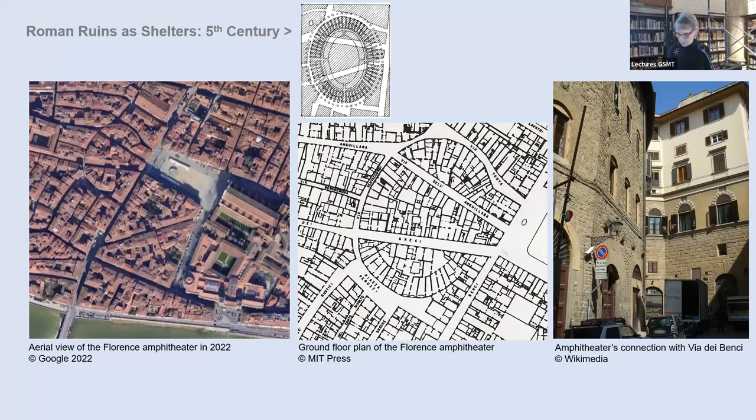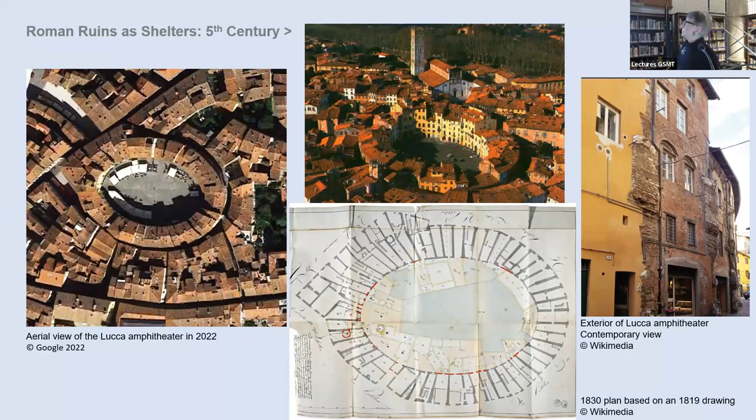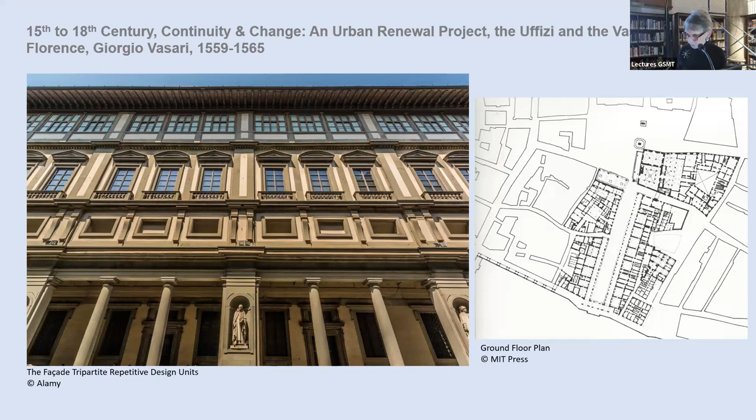And then there is, so you see this regularity here in the photograph on the left, and then the loggia towards the Arno, which is a variation on the regular modules, but is a little bit different. And then there's the corridor that goes to the Palazzo Pitti, which was meant as an escape corridor in times of urban trouble. I think the Medici were more afraid of the Florentine than they were afraid of the Sienese, for example.

So this, I call this an urban renewal project, because I think it's useful for us to remember that there are other ways to do urban renewal than the way we've done in the 20th century. And this has been vastly more successful than our urban renewal projects in the 20th century.

So now we're going to look at a project that is really, really hard to understand, but I think we'll try. Sometimes this is a case where change, and really massive change, is hidden in plain sight. When you look at this building, you think it was designed at one single period by one single person, and nothing could be further from the truth. This is a building that was built, demolished, and rebuilt, and it is dizzying.

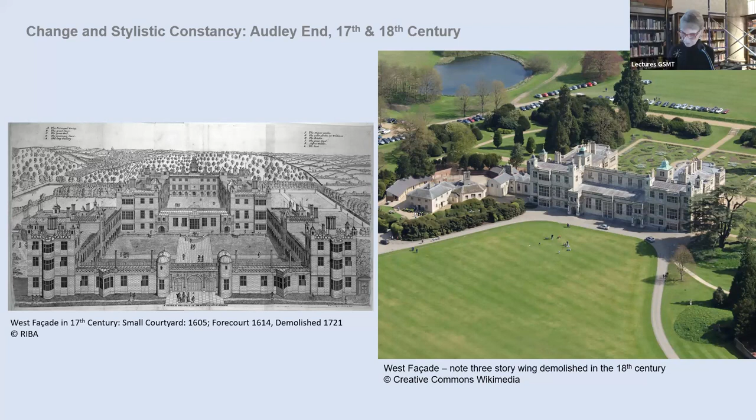So what we have now is, and this is in the same direction as this, so this still remains, these ends still remain, but this whole back has disappeared, and these back wings have been cut in half. They used to be much longer. And this happens over the years.

This happens over the years with different owners who keep redesigning the building, but redesigning it in the Jacobean style in which it was first built. So they maintain this style over the centuries. This is, I don't expect you to understand it, it's taken me a long time.

So this is the original condition of the building, and then they demolished the sides of this, and then they cut down these wings. Because they cut down these wings, this is a ruin, so they have to redesign this. Then they cut them down further. Then they rebuild them, and they're rebuilt.

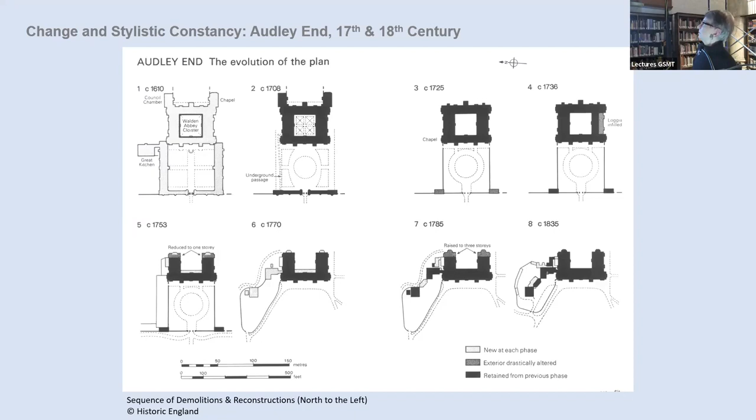But what you have to remember is that through these four centuries, because the first phase is 1605, and the last really significant phase is really in the 19th century, it's two or three centuries through which this operation happens, and people keep reviving the building in its old style, but it's a new construction.

So this persistence of dynastic ambition, you could call it, is quite fascinating. The warm colors are older, and the cool colors are younger. This is a gallery that was built by Robert Adam in the 18th century.

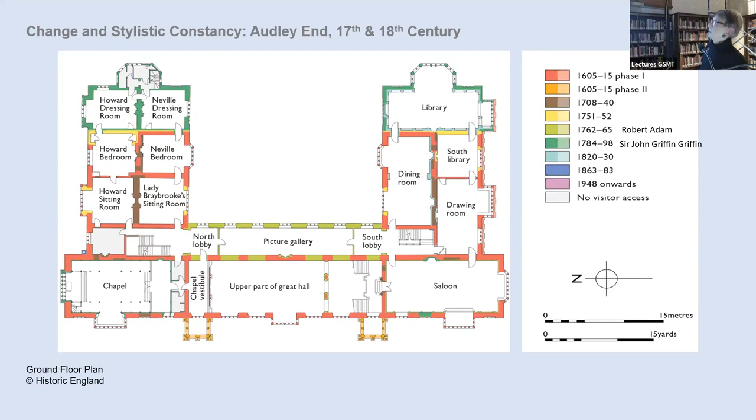So the evolution. When I said the modifications are hidden in plain sight, they are really profound. This is not a cloister building anymore. This is not a fortress anymore. This is a building that's open to the landscape, the way a classical building would be, and it's surrounded by these romantic eye catchers in the landscape.

So the relationship, the way the building presents itself, is in a way twofold. It's still a Tudor building, it's still a Jacobean building, excuse me, but it really has a classical dimension which has been added over time. And those things are profound. There are new ideas that are layered onto the building, added by multiple authors.

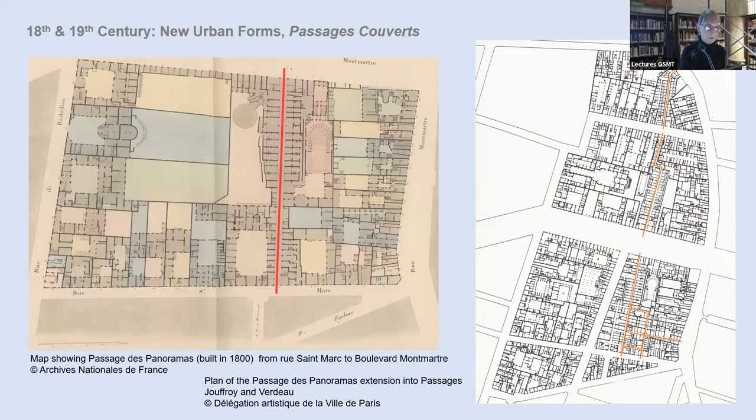The first passage was really inspired by something that had been done in the Palais Royal, which was maybe less formal, and built in the 1780s, just before the Revolution. It was built on a courtyard of a palace owned by the brother of the king, and because he was the brother of the king he enjoyed advantages that other people didn't have—one of the advantages is that the police could not come onto the site. So it was a very lively site of social life, social interactions, ladies of the night, political harangues, and so there's always been a connection between these covered passages and entertainment, and occasionally a slightly illicit set of things.

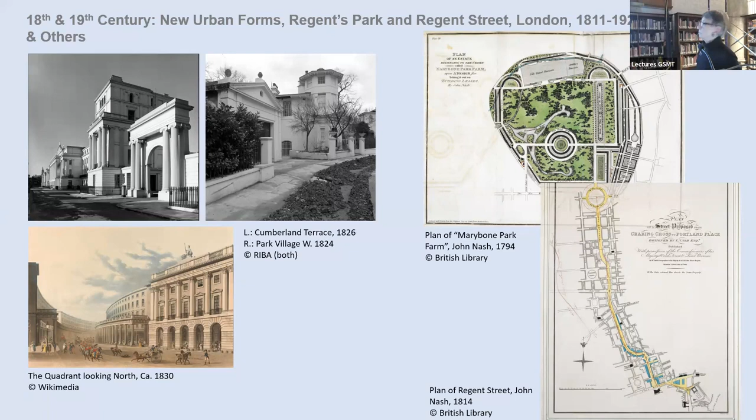But I want to show you an interesting point, which is where Regent Street turns into Langham Place and then to Portland Place.

Now, what's interesting is that Portland Place existed. It's a wide residential street, and it was designed by the Adam brothers in the 18th century. So it was pre-existing. It has these patrician houses, and I suppose that Nash couldn't expropriate them, and he kept them. But then the problem was that here was Regent Street coming, and there was a property in the way, and so he bought this property and demolished the center mansion.

But what's to me really a valuable lesson is that he kept the things that are in light pink, buildings which are kept. These buildings still exist. And he just lined the street with very narrow, very shallow buildings, and then used All Souls Church, which he designed, as a pivot for the turn of the street. So the lesson is that demolish as little as you can and use all the accidents that you can to your advantage. And he certainly did.

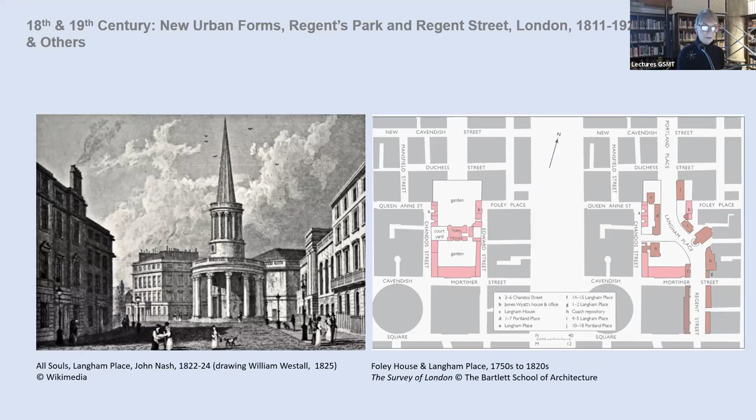So this is the termination of Regent Street through Portland Place, into this monumental, almost Roman scale housing. But the whole estate has also these little buildings. So the whole architectural palette is in part about consistency, but in part about the accident.

Again, the backs, as in the Vasari project for the Uffizi, the back is frayed. It's like the back is allowed to do what it needs to do to meet the city.

Now to the Barcelona Pavilion. This was built in 1928 for a fair in Barcelona, and actually very few people saw it. Only the people who went to the fair, and it was not up for more than a year. It was up for less than a year.

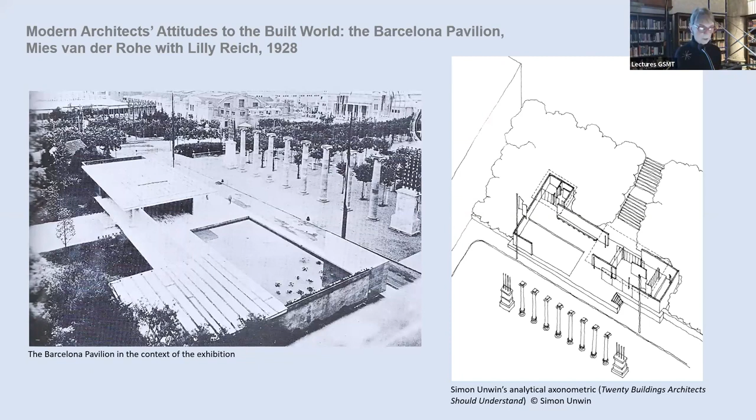That is in a way devastating, because it denies the elements of the design that Mies had used to make his design valuable. This was, on the part of Mies van der Rohe, a manifesto for modern architecture, in opposition to the old, tired formal world of Beaux-Arts architecture. And what better place to be than in a grand Beaux-Arts plan with all these Beaux-Arts things around, including the columns. So if you eliminate all of that, you deprive this building of its revolutionary force, and it's a profound misunderstanding of it.

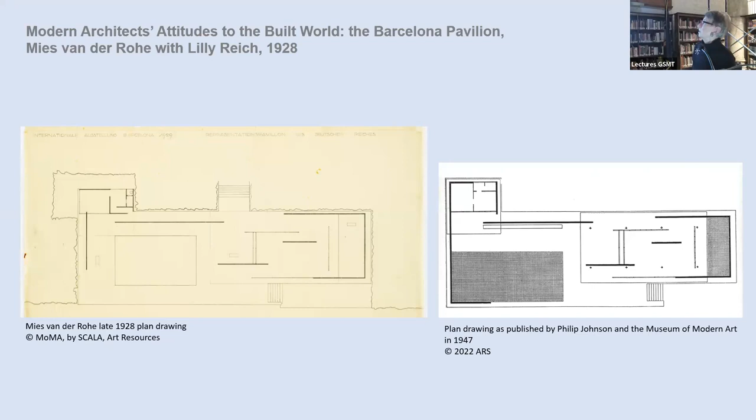Why is it important to analyze buildings in a more complete way than we tend to? It's important because when this building was rebuilt in the 80s, it was rebuilt without the columns. If you've seen it, it is profoundly disappointing, because it's missing all this processional aspect to it. So you cannot say the building has been restored. It's been rebuilt, yes, as a building, but it's really lacking, in my view, of the elements that made it what it was.

This is in a chapter I call Reclamation of Urban Fragments Post-World War II, and it's the Alte Pinakothek in Munich by Hans Döllgast, 1952 to 1957. I owe knowing this building to my friend Harry Kendall, who is here. Thank you.

This is a beautiful museum designed by Leo von Klenze in the 19th century. But what happened? Look at the middle. What did happen? To this ordered, classical revival building with repetitive arches, a center porch, and these skylights over the exhibition rooms, in 1945 a couple of bombs fell in the middle of the building, cutting it in two and cutting out the roof practically.

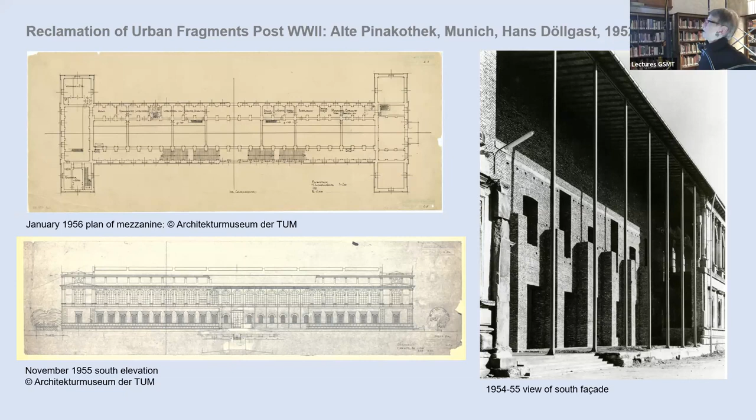He never wanted to restore von Klenze's design—the von Klenze design is left as is. When he brings back the wall, he brings back the visual structure of the windows and the visual rhythm of these bays, but in an abstracted way, and he builds it in brick—actually reclaimed brick from a nearby caserna. It creates moments of really extraordinary interest as these two things meet.

He decides to do away with the pyramid skylights that von Klenze had done, for a more minimal, trim, and linear set of skylights, supported by steel columns and a new cornice, again abstracted. When you're there, it is a very beautiful thing to see—both painful and beautiful, and you're aware of the passage of time. It is quite a wonderful thing.

This is our penultimate building: the addition to the Pepsi Cola headquarters. The original Pepsi Cola headquarters was designed by Gordon Bunshaft with Natalie de Blois of Skidmore, Owings and Merrill in the 60s, and it was designed as a very ideal object, in a way like Mies' Pavilion, in opposition to the dark city.

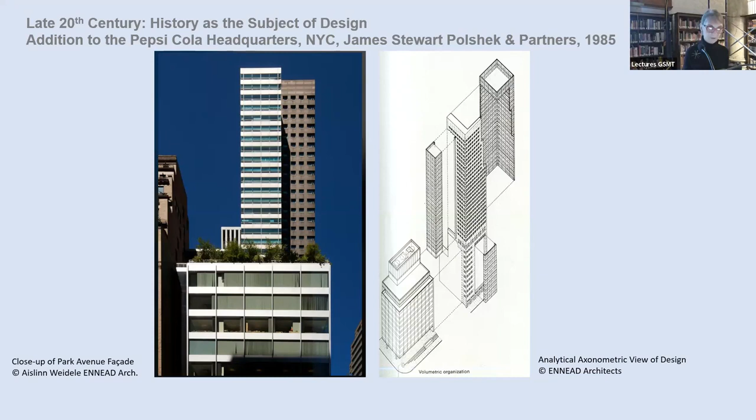So this fantastically modern building that Bunshaft and de Blois had done, which was separate from the city, now is described by the new architects as having joined the city. It's an interesting twist.

Finally, we will end on a small building on Duane Street, to remind all of us architects that you should be ambitious even with a small building. This is on Duane Street, on Duane Park. It's now being added to as we speak, so it's going to change again. But this was a warehouse, and the area was not designated as a landmark district.

The architect Polsinelli decided to save the cast iron facade, and then insert a modern building inside. You can see here this very neutral grid of glass blocks. Again, this is a concept: an insertion of a new thing inside an old thing. And again, this is quite a beautiful building.

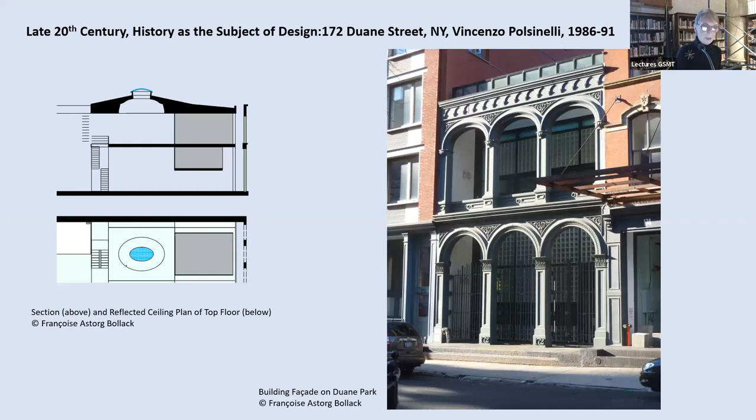This is not a new idea. This is a reverse idea from the Basilica in Vicenza. And this idea had been tested by Mitchell/Giurgola in Philadelphia a few years before 1970 - in my view, a less successful iteration.

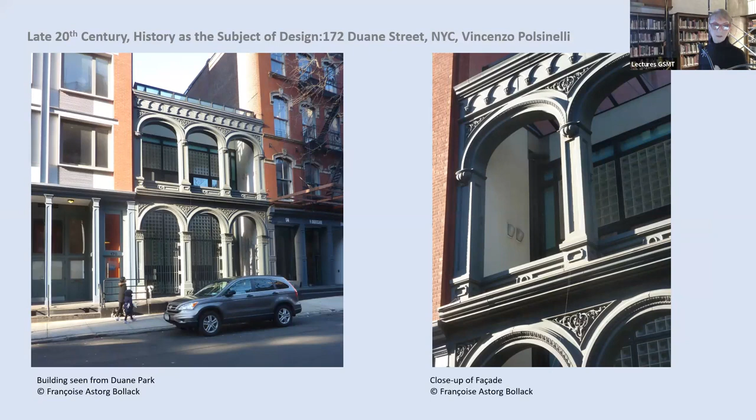This one works better, because Polsinelli was able to create a very neutral background, so this is allowed to be the preeminent thing that you see.

And one wants to help what has been done and not to spoil what one has yet to do. Alberti said this when he was working on the Tempio Malatestiano, where he wrapped a new facade around a late Gothic building. He's already asserting the architect's responsibility to the past and to the future, and the fact that the architect has to be mindful of both. This couldn't be a greater statement, in my view, of architectural responsibility to the built world.

So thank you very much.